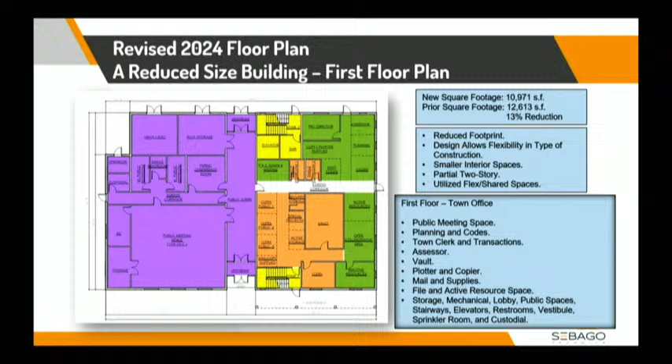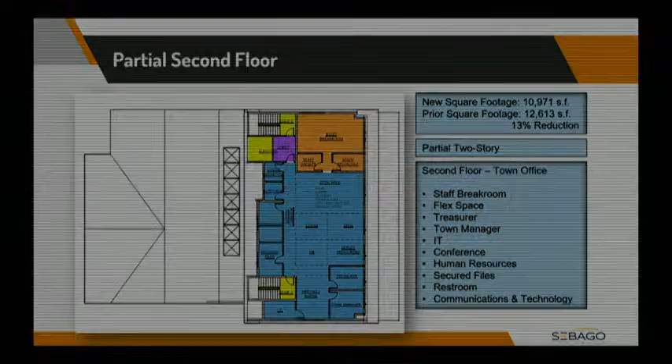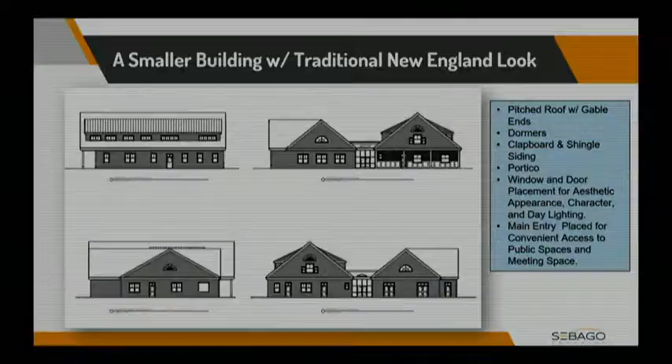Next slide, please. All right, back to Owens. Can't let you have all the fun.

So we'll be back to talking more about the buildings in a few minutes, but we wanted to spend a few minutes to talk about the sites we looked at.

One site that has been a topic of conversation is the existing town office site off Elm Street. This property is very small, about 0.3735 acres in size, so about a third of an acre. Just looking at the building, parking and support around it, the minimum we need is really around 1.5 acres. So we did talk about whether this building could go vertical, multi-story.

We actually had Allied Engineering go through and look at the building. The challenge is that it's 1950s construction. If we have goals of energy sustainability, it was never designed for a second floor, so structurally it would have to be significantly modified, and it would have to go up multiple floors because the footprint is small.

The town office building is about 3,723 square feet right now, and then there's a back garage portion, about 2,000 square feet. So it's much smaller than what would be needed by the programming for the building.

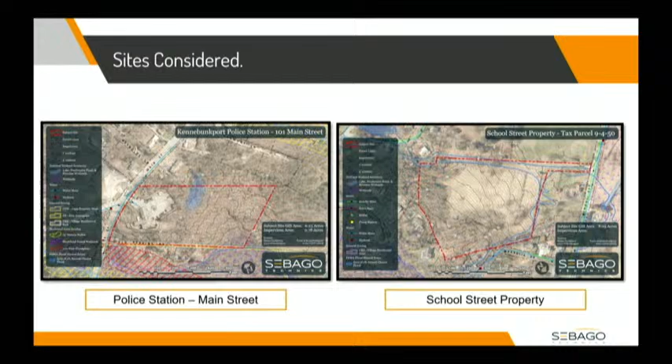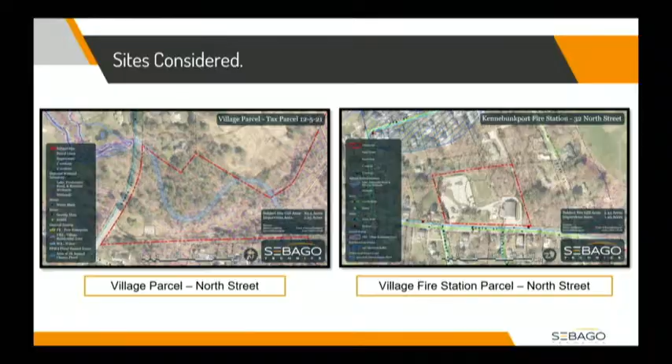Looking at those five sites, the committee worked collectively over a number of meetings to come up with what was important for each site, find common factors we should evaluate, and then develop a scoring matrix. Red was unfavorable, yellow was caution with more things to consider, and green was favorable. We gave red a -1, caution a 0, neutral, and green a +1.

So we went through each of the sites. For instance, available acreage: 51 North Street was neutral, it had adequate space but not an over-the-top amount. Elm Street, the current town office, was obviously not adequate. 32 North Street was the same. 101 Main Street, and of course School Street, had a pretty good sized parcel, so that got a 1.

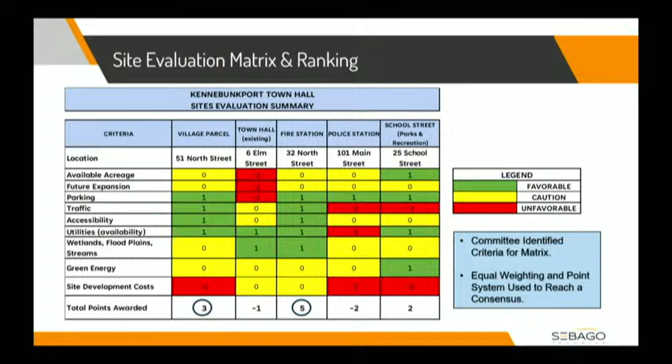Next slide, please. So talking a little closer on the two sites that were ultimately considered more amenable to the development program. One is the village parcel, you've seen that one before.

What you see is two concepts we looked at. The access road on the right side is a little bit longer, coming in with a parking lot. The purple would be the public space, the meeting space. We wanted that towards the parking for convenience, with the town activities towards the backside. The other option on the left preserved that future access, because nobody knows what happens later on with the rest of the 85 acres, but we wanted to preserve that option.

It could provide a second point of access at some time in the future to the town office property. But there was conversation that as you go north on North Street, you come up to a crest on a curve and then it starts to drop gently. Up there is actually pretty good sight distance, which was brought up by a few committee members who spent time looking at it. I went out and looked, and they are correct. The sight distance is almost right across from the crypt...

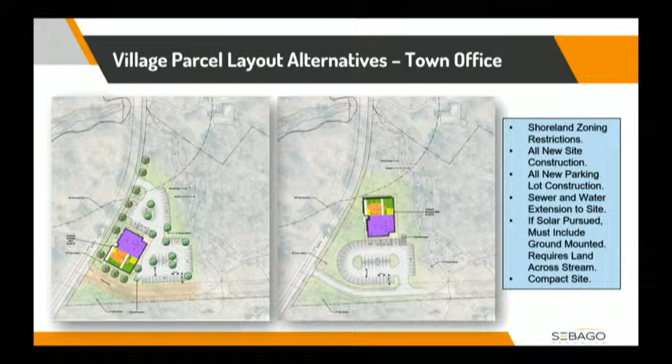Next slide, please. So you've seen this plan already. All it's showing is it would be the same building, just mirrored. As I showed in the last option, one option had the public space to the north, and one had it to the south. But it's the same building, just in a mirrored fashion. Next slide, please.

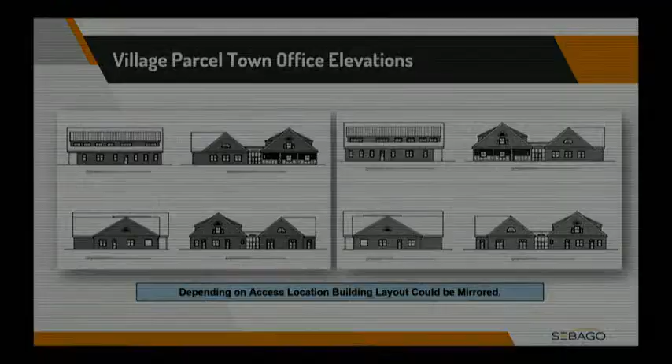Okay, let's talk about this site. The committee wanted to look at how the town office might fit on this parcel. What you see on the right is the existing fire station with the fire apron, and next to it, in a teal color tying into the green area, would be the new town office. So there would be a connection between the fire station and the new town office.

There would be some parking up front on the town office. It preserves the bulk of public parking in that lot. We were proposing staff-only parking of 26 spaces in the back with 2 additional spaces for first responders. It would be a one-way circulation around the site for town office and first responders, with the primary parking integrated into the main parking lot.

A couple things on this site: it has the advantage of using existing grounds already developed, and it provides connectivity between the town office and the fire station. The site development area is reduced by about 40% from what we'd need at the village parcel or another green site, so there's ability to save on costs in this location.

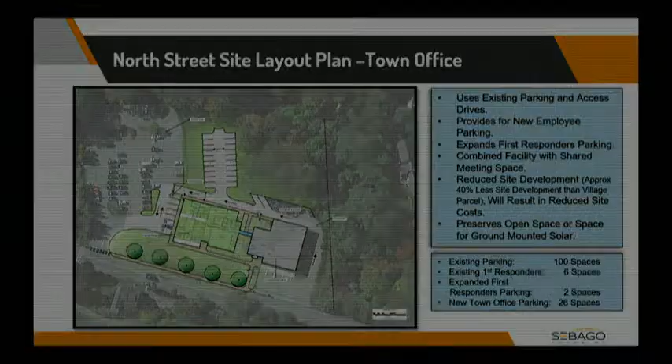Next slide, please. Mike, you're back up to talk about how they integrate with each other.

This particular plan shows, as Owen had previously indicated, on the right-hand side shaded in gray, the existing fire station. Then 24 feet away would be the area shaded in light green, which would be the potential new municipal office building. The connector is the blue piece in between.

There's roughly 24 feet of separation between the new municipal offices and the existing fire station in this design. That's in order to address what could be the future needs of this fire station when it goes to per diem.

The elevation you see down below, on the right again, is the existing fire station. You see that little connector in between them, and the municipal office design on the left. This particular plan shows it flipped from the previous version, with the municipal offices' two-story portion on the far left of the new building, and the public meeting spaces, restrooms, and other support on the right-hand side. That layout helps double up on that meeting space and allows the fire department to utilize that space for training purposes. So you're getting a 2-for-1 in this design, making it a much more efficient use of both buildings. That was the primary reason for flipping the plan.

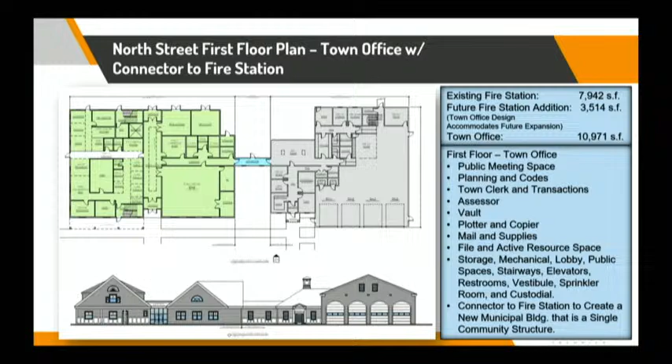Also, the new parking spaces that Owen mentioned on the left-hand side of the town hall addition would be closer to the offices where most people come to transact business. I think that's pretty much the summary for this layout.

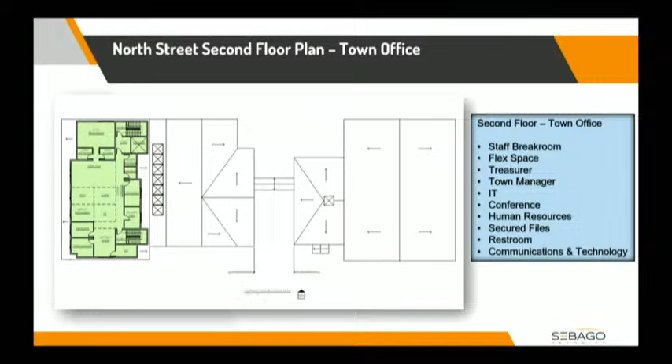We were asked to do a study of the existing fire station and what its programming needs would be when it goes to a per diem operation. It turns out we came up with: a new truck bay is needed to take care of all the apparatus, there would be four double-occupancy bunk rooms needed for the per diem firefighters, and we convert some of the existing interior spaces for other supports the per diem folks need -- day room, laundry, showers, bathrooms, those kind of things.

The blue areas you see around the gray of the existing fire station would be the additions needed to this building to accommodate its future. That 24-foot separation I spoke of before, between the existing fire station and the new town hall, is where the bunk rooms, the changing shower bathrooms, and the laundry area are for the per diem. We've also maintained that connection between the existing fire station and the new town hall through that addition, so it continues to facilitate the co-use of that large public meeting space by both entities.

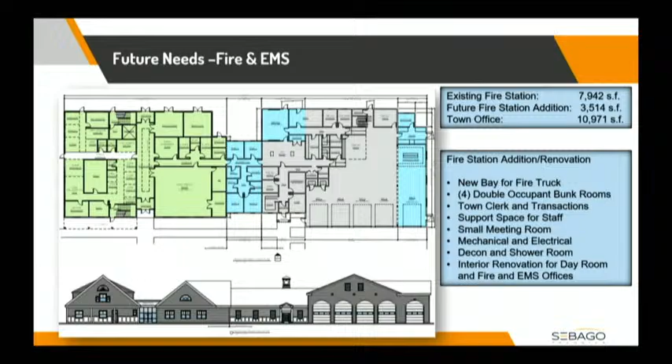That gets us to the end of our presentation. I was pretty close to my 30 minutes -- I ran over just a little bit. But the next step is we're just going to welcome your comments and thoughts. Once we get that comment, the group's going to meet again to go through the public comment, and eventually hope to make a presentation to the Board of Selectmen on the site preference, and then hopefully the committee would continue to refine the building design and cost.

And Alan, did you want to add anything? Are you going to moderate the public, or? Just wanted to thank you and Mike for your presentation and the fine effort putting this together for us.